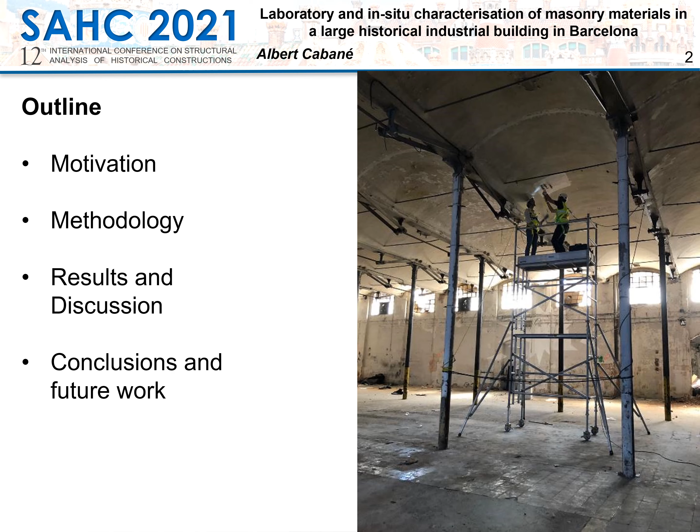The outline of this presentation is divided in four parts. First, the motivation of this work. Second, the methodology used during the research. Third, the results and discussion of the data obtained will be presented. And finally, the conclusions and future works extracted from the research will be shown.

This research has different motivations. The first one is to obtain a careful characterization of the material components in existing structures in order to evaluate their strength capacity, combining laboratory and in situ techniques. The second one is to expand the knowledge of different minor destructive techniques, cross-checking the in situ values with the laboratory test results. And the last one is the evaluation of the laboratory tests carried out on masonry components and masonry specimens, developing non-standard specimens if necessary.

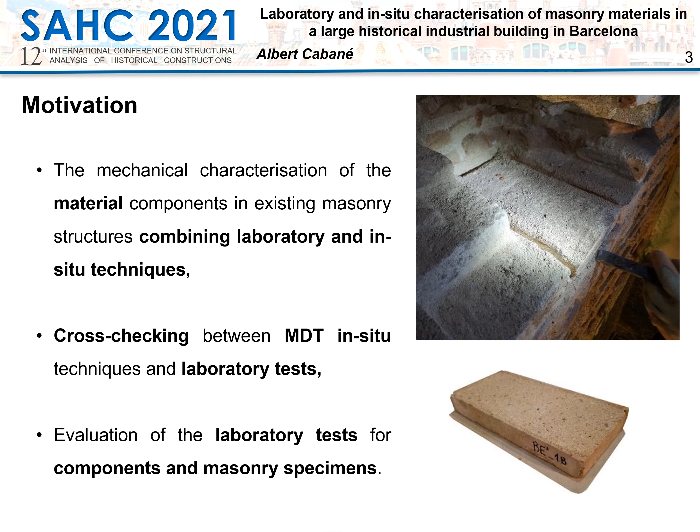The methodology applied during the experimental program is divided into two main branches: in situ and laboratory program. The in situ program could be subdivided into two steps. The first one is the use of minor destructive techniques on lime mortar and clay bricks. These allow a preliminary evaluation of the variability of the properties of the large building in order to optimize the sampling extraction. Then, the second one is the extraction of small samples for the laboratory testing.

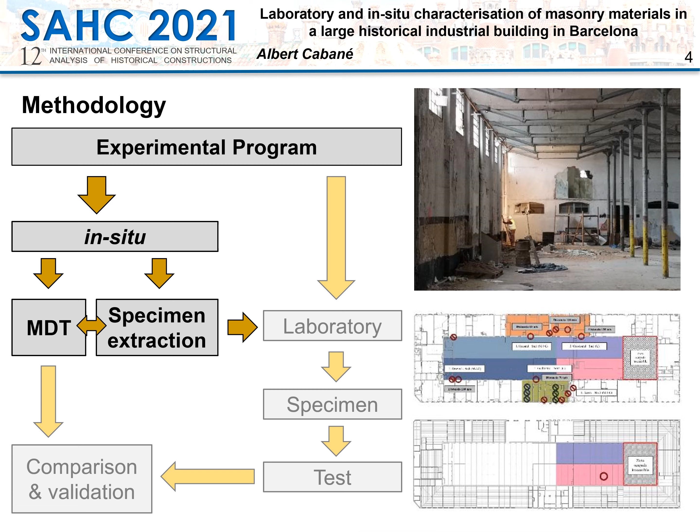The second branch, the laboratory program, is based on the production of different standard and non-standard specimens on which compression tests are carried out. Finally, the combination of laboratory and in situ characterization allows useful cross-checking data to obtain a careful characterization of the material components and the masonry.

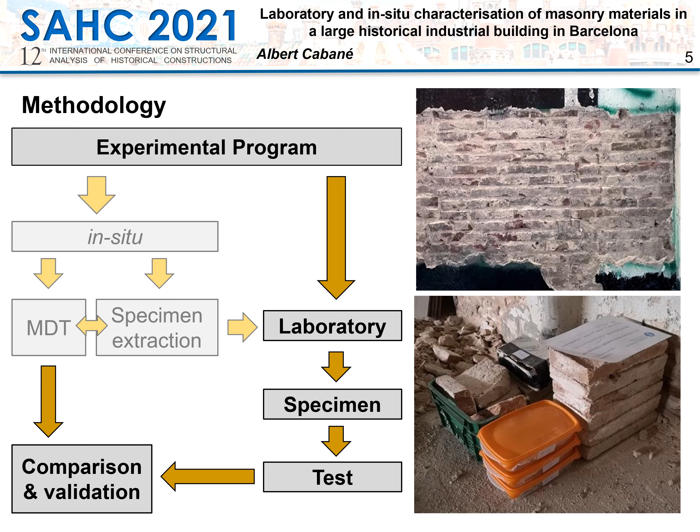The in situ experimental characterization was carried out by three different minor destructive techniques. The first one, the pin penetration test, was executed on 6 zones of masonry walls and on 4 zones of mortar plasters in order to evaluate the lime mortars and the clay bricks. The pin penetration test measures the penetration of a 3 mm diameter pin fired perpendicularly using a specific device. This commercial device is commonly used on concrete and cement mortars. However, a previous research developed at UPC showed the use of this tool on low and medium strength lime mortars.

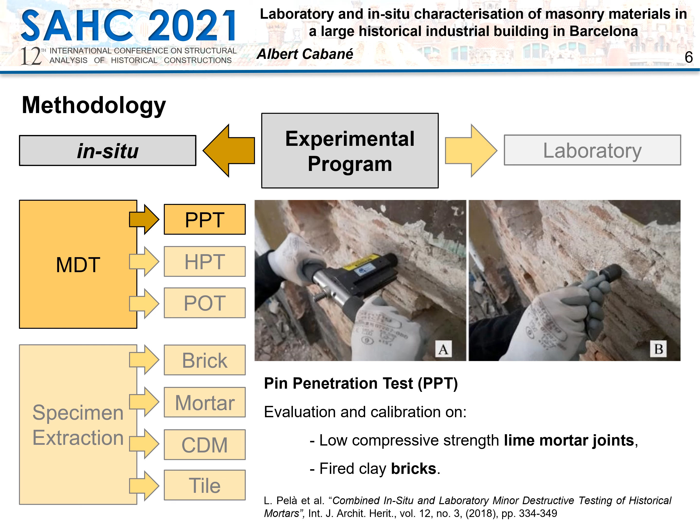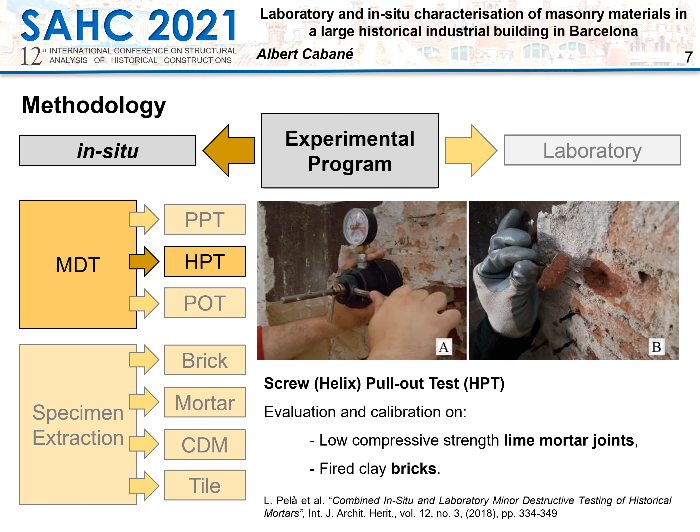The second minor destructive technique was the screw helix pull-out test, executed on the same 6 zones of masonry walls to evaluate the mortar joint and the brick components. This test measures the maximum pull-out force reached by a high-strength steel helical tie. The pull-out force is used to characterize the material tangential stress. This test could be found in previous research developed at UPC, usually executed on mortar joints.

The third in situ technique considered was the pull-off test, executed on the same 4 zones of mortar plaster where the first test had been carried out. The pull-off test measures, using a dynamometer, the perpendicular pull-off load applied on a 50 mm diameter metal disc. These pull-off forces evaluate the adhesion strength of the lime mortar plaster on the masonry.

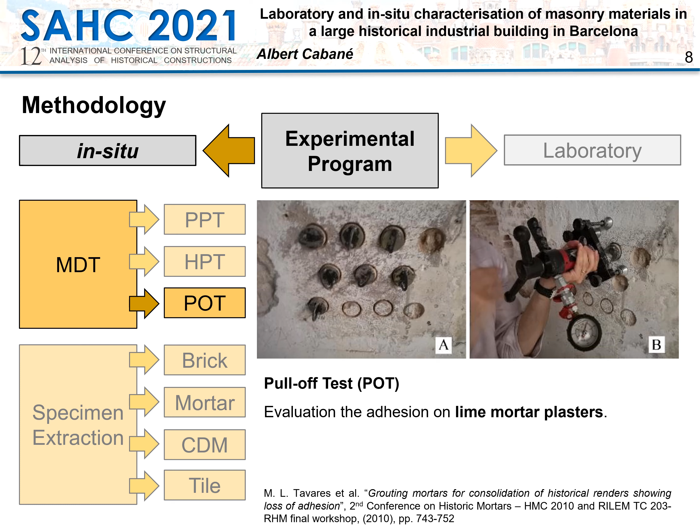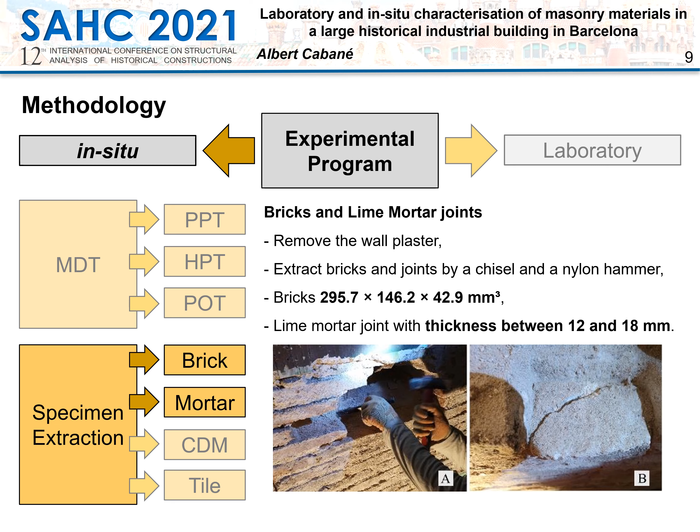The in situ program presents a second step based on the specimen extraction. To start the extraction of the masonry components, it is necessary to remove the plaster using mechanical tools. The extraction of the bricks and lime mortar joints was carried out manually by using a thin, sharp chisel and a nylon hammer. During the extraction, proper conservation and in situ classification of the samples is essential.

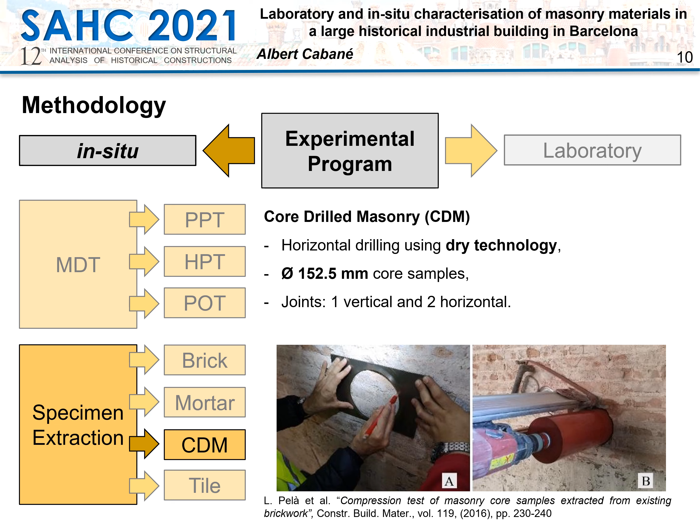The extraction of the core-drilled masonry samples was done by horizontal drilling using the dry technology proposed by the previous research developed at UPC. It is important to mark the samples before the extraction to guarantee the correct drilling. At least 3 extractions are necessary for the correct characterization of the masonry, although in this campaign, where it was possible, up to 5 samples were collected. Once the samples have been extracted, it is necessary to maintain the integrity of the cylinders, avoiding disintegration of the sample components. Finally, in this campaign, timbrel vault components were characterized too.

Extraction of their components was done from the top of the timbrel vault. A thin chisel was used to remove all the lime mortar joints around the tile to be extracted, and then a trapezoidal trowel was slowly inserted under the tile and used as a lever. While levering the tile up, the trowel was lightly tapped with a nylon hammer, trying to avoid any crack appearance in the tiles.

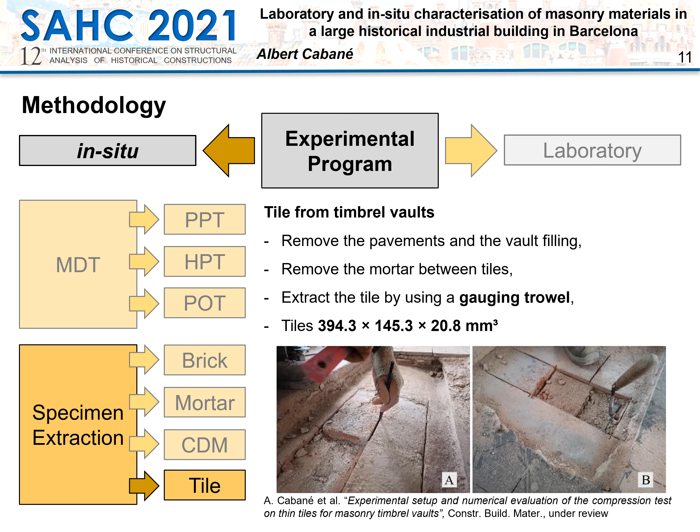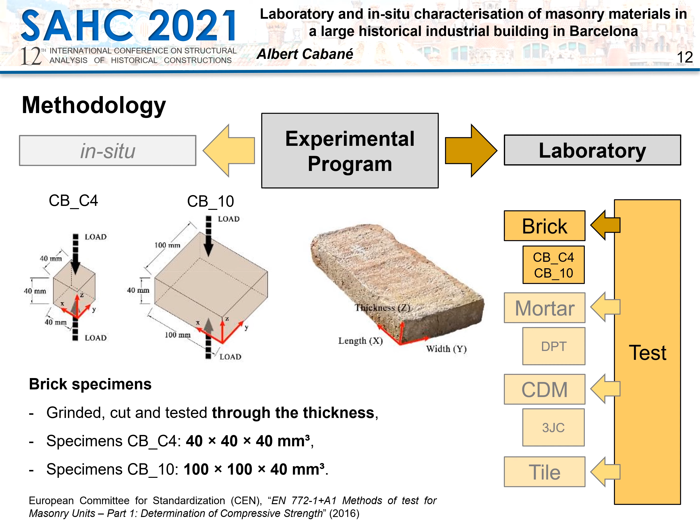The laboratory experimental characterization was carried out on the specimens produced with the extracted masonry components and core-drilled masonry samples. The specimens were prepared according to the procedures specified in the European standard, polishing the load surfaces until a constant thickness of 40 mm was obtained. At least 6 bricks were considered for every extraction zone, and 2 standard specimens for each brick were cut. Further, a second non-standard specimen was considered. The non-standard specimens were obtained from the same bricks as the standard ones. The proposed specimen was a cube with a side measuring 40 mm.

For the case of the mortar samples, it was difficult to prepare regular specimens with a square dimension of 50 mm side as the German standard recommends. This difficulty arises from the low consistency and cohesion of the samples.

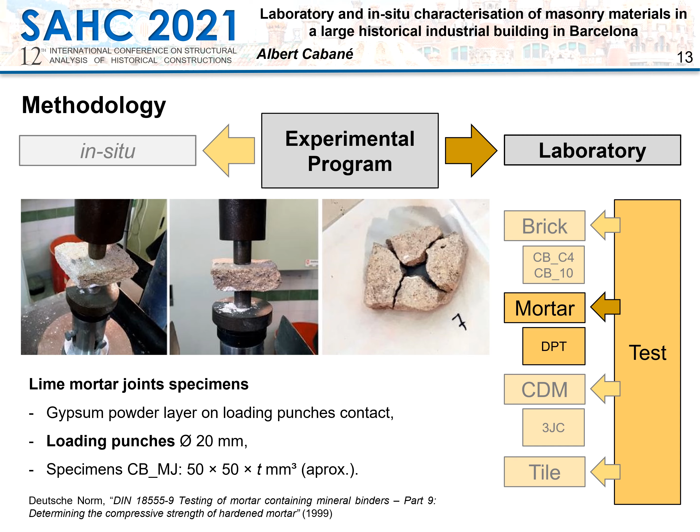However, given the large number of samples collected, the analyzed samples have sizes close to the standardized ones. To characterize the core-drilled masonry specimens, two high-strength mortar caps were cast on the top and bottom, creating two flat surfaces. The specimens were tested in two stages.

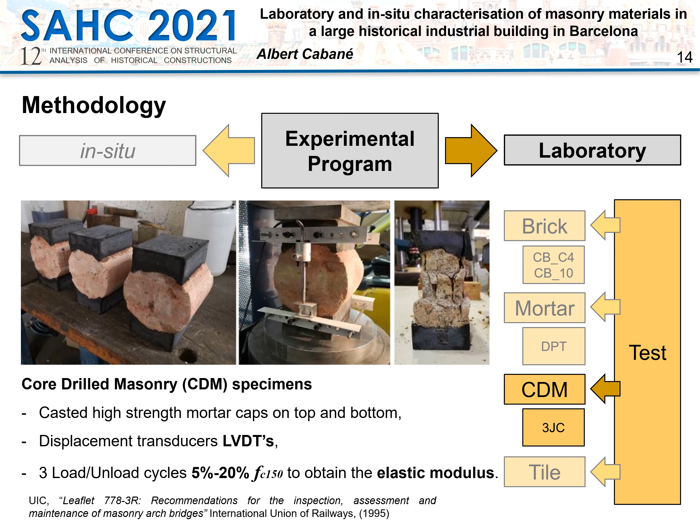The first stage was oriented to study the elastic behavior of the masonry and consisted in the application of three loading and unloading cycles. The second stage of the test was aimed to characterize the compressive strength of masonry, testing the cylinders under compression until the maximum load was reached.

Finally, a new methodology for testing thin clay tiles was developed. This methodology overcomes the problem arising from their limited thickness in the loading direction. For this purpose, a new specimen assembled from two clay tiles was proposed. Testing the assembled specimen instead of the single tile allowed the reduction of the slenderness during the compression test.

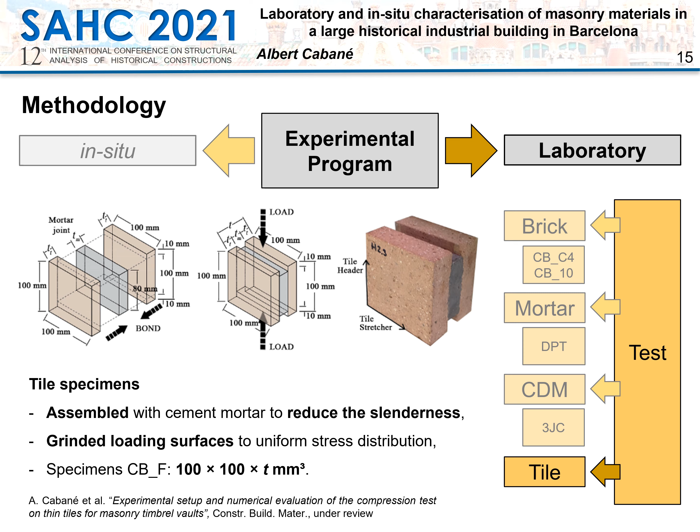In the relations obtained in this research, we could observe that the in situ evaluation of the mortar strength shows a possible trend correlation with experimental laboratory results. However, the evaluation of the bricks does not show enough sensitivity.

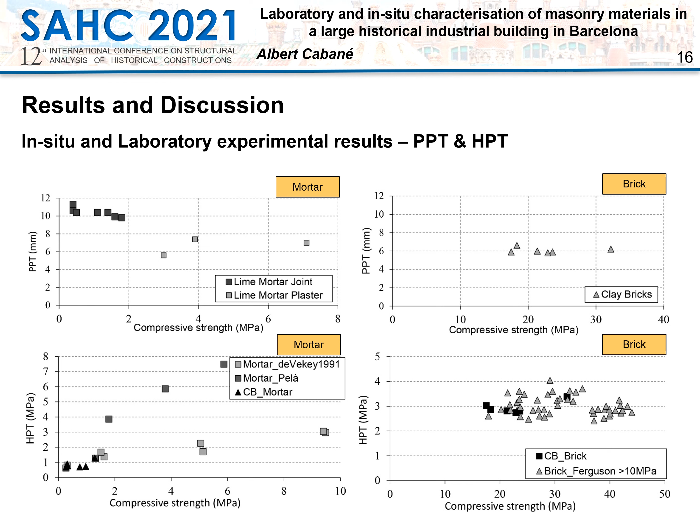Another stage of the experimental campaign considered compression tests on non-standard cube specimens. During the testing phases in the laboratory, the failure modes shown by the non-standard specimens were observed. The failure modes showed equal cracks on the four exposed faces and didn't show any tensile crack. These failures were compared with the indications in the European standard for satisfactory failures of concrete cube specimens.

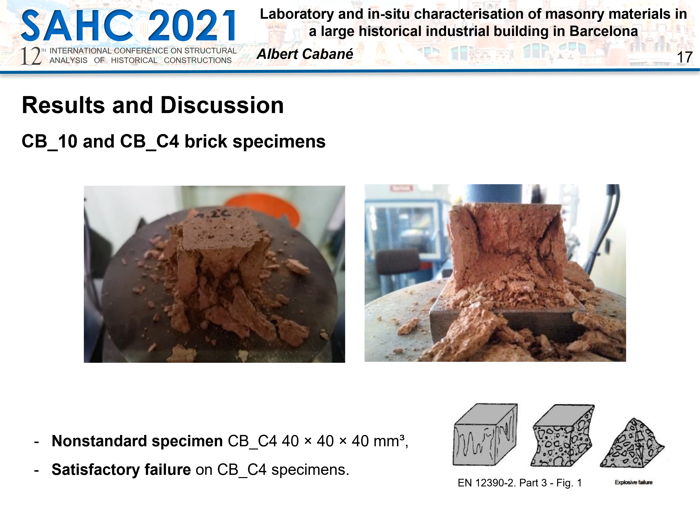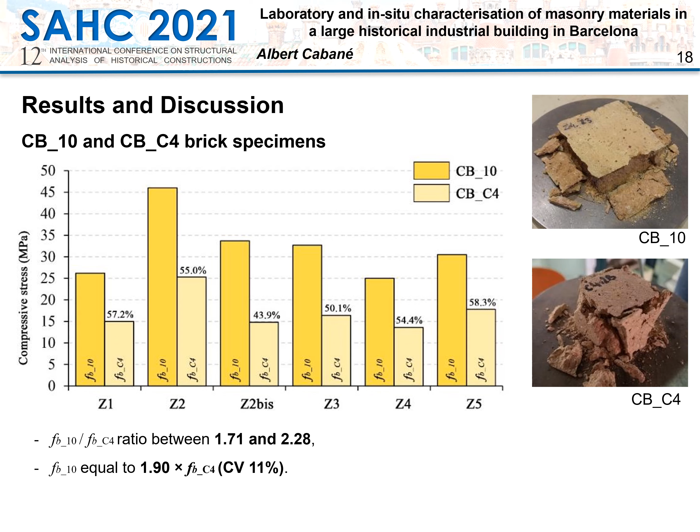Furthermore, this proposed specimen has shown satisfactory coefficients of variation in its strength average, similar to those obtained with the standard specimens. Now, we can see the relationship between the experimental compressive strength obtained on standard and non-standard specimens. This comparison makes it possible to observe that the average compressive strength obtained in the non-standard specimens represents between 44% and 58%. This represents an average ratio of 1.9 between the compressive strength obtained with the standard and the non-standard specimen.

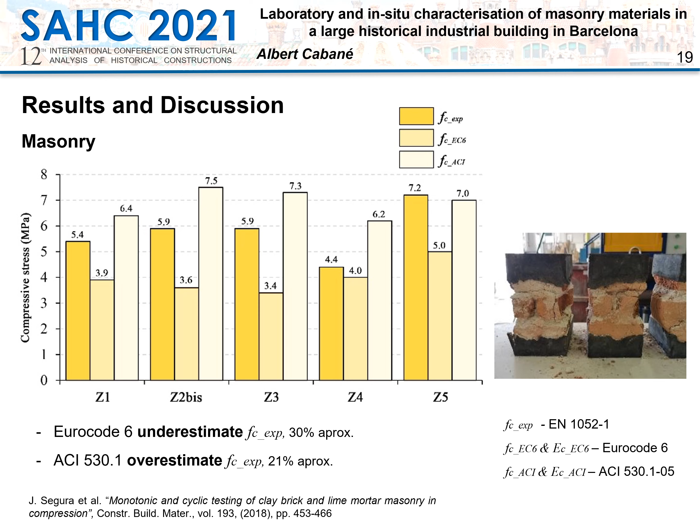The characteristic compressive strength of the masonry has been evaluated from the experimental averages and the empirical equations provided by Eurocode 6 and the American requirement for masonry structures. As observed in the graphic, Eurocode 6 provides the lowest values, while the American requirement results are higher than the experimental ones. Previous research at UPC provided a good relationship between the empirical and experimental strength for masonry with lime mortars over 2 megapascals strength. This good relationship has not been found in this research, developed with low-strength lime mortars. In these cases, masonry samples have a lime mortar compressive strength between 0.3 and 1.3 megapascals.

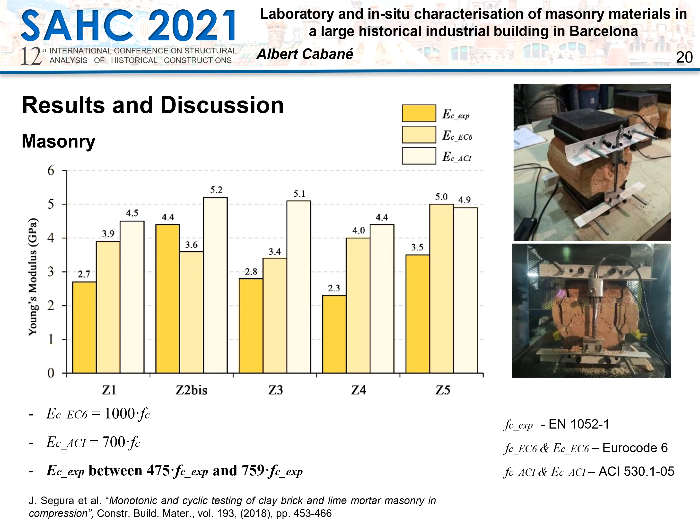The Young's modulus of masonry has also been analyzed in this campaign. The Eurocode suggests a value of 1000 times the compressive strength, while the American requirement suggests 700 times. This graphic shows that the Young's modulus estimated from the standards could be overestimated compared with the experimental ratios, ranging between 475 and 759 times.

Finally, the results obtained for the 22 assembled tile specimens were satisfactory. These results have been characterized by satisfactory coefficients of variation for historic handmade fired clay units. These were 20% and 22%, similar to the brick specimens tested in this campaign. The failure mode of the tiles was characterized by the separation of the tile into two parts due to the propagation of a crack throughout the whole thickness of the tile. This means that stresses were developed inside the tile.

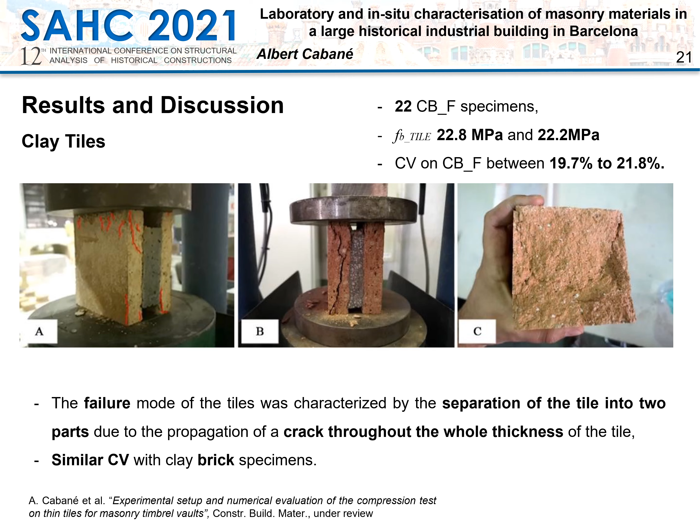We are going to present now the conclusions and the future work that we obtained in this research. The in situ minor destructive techniques have provided clear correlation trends in the evaluation of the mortar strength. In particular, for the case of mortar, the sufficient sensitivity of the HPT and PPT tests allows the possibility of relating the results with experimental laboratory values. The in situ minor destructive techniques results for the evaluation of the clay bricks still do not show sufficient sensitivity to the variation of the material strength.

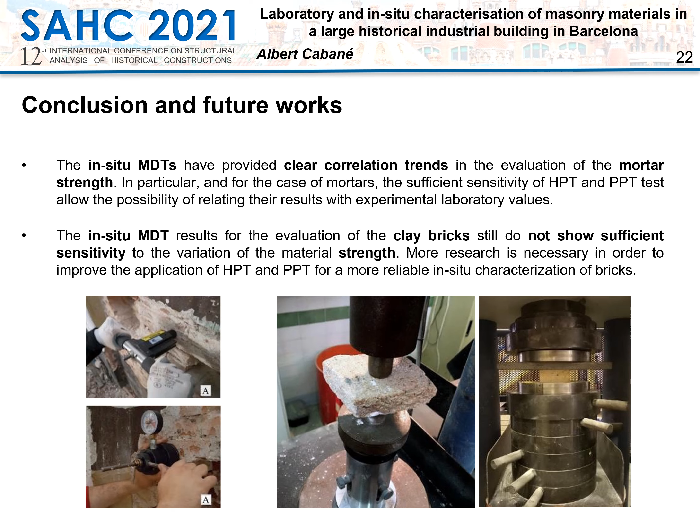More research is necessary in order to improve the application of the HPT and PPT for a more reliable in situ characterization of bricks. Tests on non-standard brick specimens show similar scatter to the standard ones. Moreover, a clear correlation could be found between the compressive strength obtained with the two specimens. However, further investigation should be done to analyze the influence of the specimen's size and shape on the compressive strength.

The empirical equations provided by the building codes yielded values that overestimated or underestimated the compressive strength obtained from the extracted masonry cylinder cores. And finally, the laboratory testing on novel types of specimens showed consistent results. In particular, the research proposed a novel methodology for the characterization of the thin tiles of timbrel vaults.